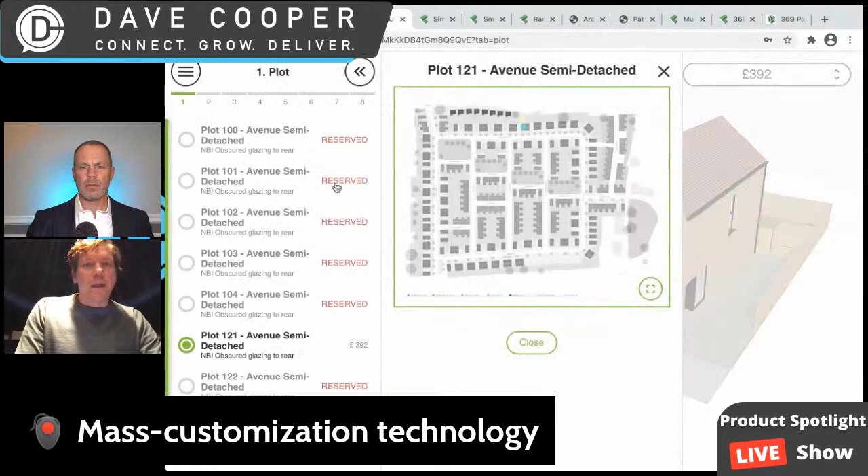So this is actually a project in the UK. It's NU Living, or Swan Housing is the developer, and they have a development of 250 homes in Beechwood, in Essex. I'm just going to run you quickly through it. You see lots of these have actually been reserved or sold, so there's only a couple of plots available here. Let me go with this one and show how it looks.

Essentially, we're dealing with the full 3D model. Are we actually on a builder's site right now that's using this? Yes, it is. It's a live version, so you can go there and complete the journey and then submit your order. And if you have enough cash, you can buy it as well. This solution can be embedded to any of the websites.

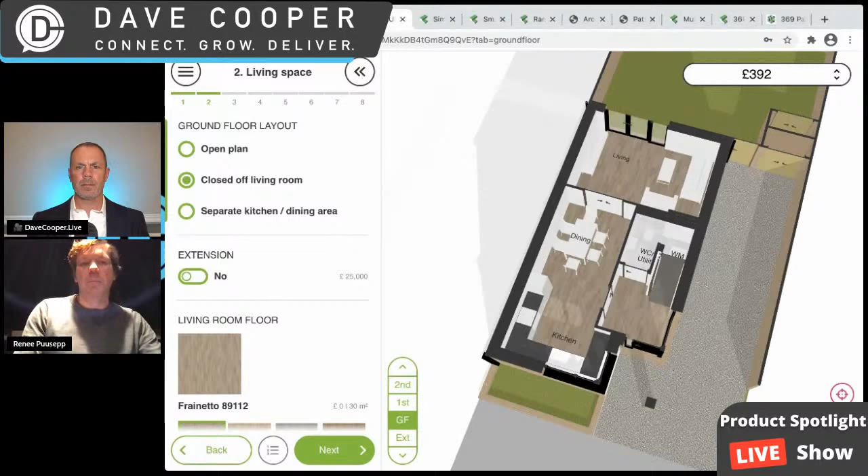I'm currently showing it to you from the Creatomus platform, straight from our back door, but essentially the way it interfaces with the home buyers is actually embedded to the development website. So just what options can you have?

We have things like we make the geometries, and you'll note how the pricing is changing as well, so each of those components can have a price component. We have material choices here. Let's see what we have. Oh, we have like furniture, equipment, anything you can choose, and each of these choices can have its own price tag.

What else? You can go down to door knobs. I mean, they even have a wine cooler here. How good is that?

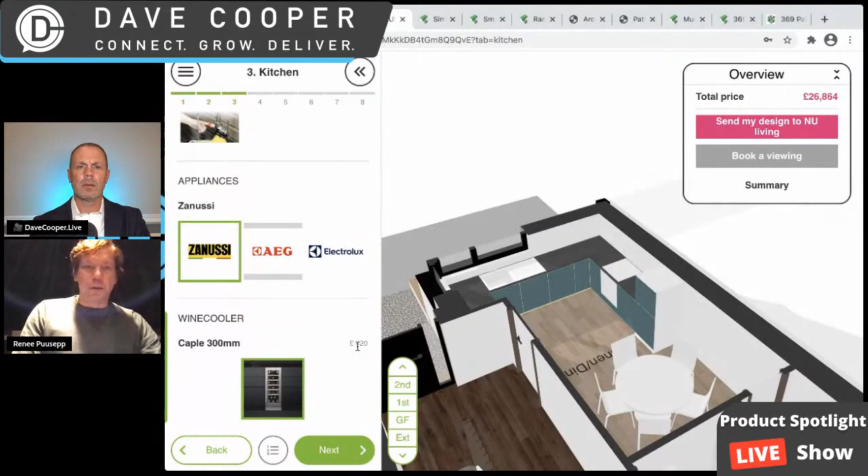Another way this configurator is helping the developer is to upsell their product. So if you want the wine cooler, you have to pay 420 extra. So basically, as a consumer, this developer has this on their website, and as a consumer looking for a home, I can go on their website and configure everything in the house that I choose, and it's actually giving me real-time pricing.

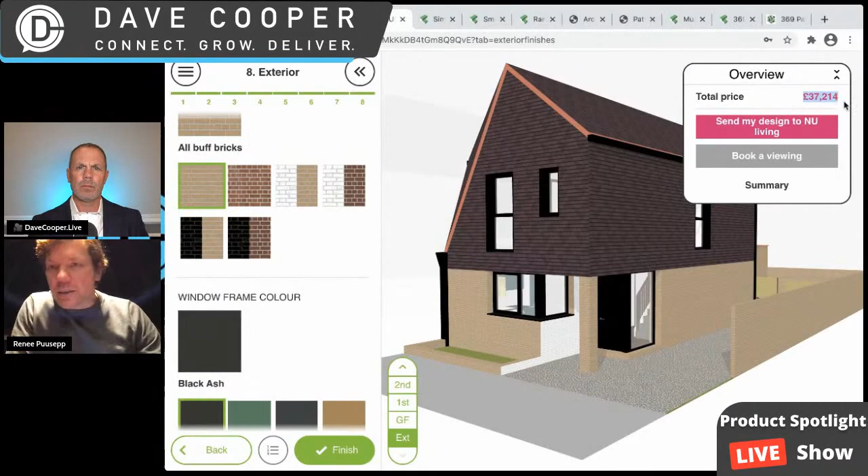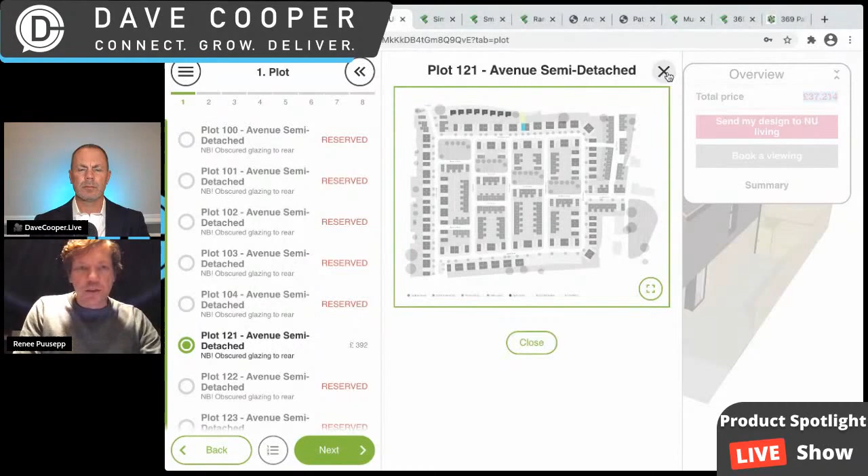Indeed, so that's the price that you have to... oh, actually I need to go and change. I think it was one of them. Let me see. Oh yeah, sorry, I'm not showing the live version, I'm in a currently developed version. So yes, it will show you the full price, and then we'll see it in other cases.

I'll run you through the entire journey. So basically, once you've done your customizations, you get to the summary, where you get the full overview of your chosen designs, with those images as a takeaway. You can download the summary, you'll see all of your choices here, you'll see the price of all of your choices here, and then you simply download the summary. And bang, you got the PDF takeaway, which is actually your order.

And this order was sent to the e-signing. It's actually using a digital signing platform, and the orders are completed online as well, kind of bringing really the buying and selling of houses online.

So with this developer, they're not a manufacturer, but they work with a manufacturer. Is that how I understand it, or are they the manufacturer as well? They have a manufacturing arm as well. These houses are actually made of CLT panels. They bring CLT from Europe but put it together in the UK factory, their own factory, and then it's transported to the development site, which is quite close to the factory, so it seems to be like a good way of doing it.

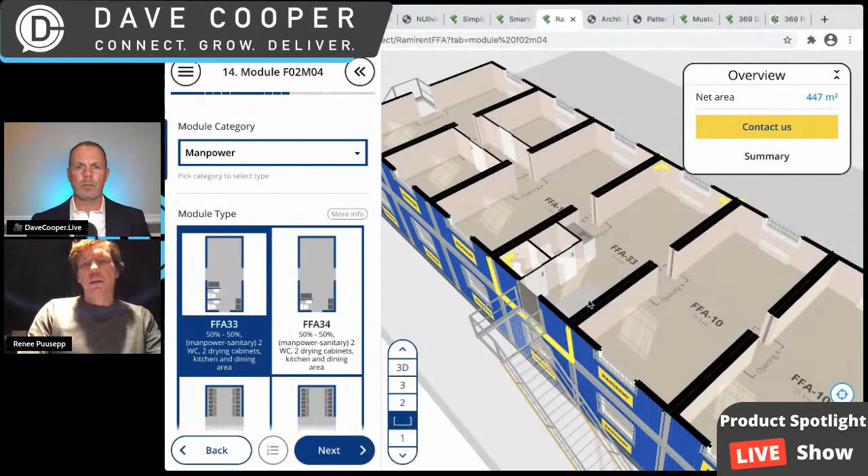You can choose the doors, and then you've got the clickable option. You can go into a specific module and configure this one. Let's choose this one—each module has its own sub-choices. And we also moved... let me show something from behind as well here.

So this is one example of a student dormitory. There are actually a couple of different options here. Let's see if I can show that.

In this case, we're actually in a full volumetric modular mode. So you can go and choose—not just pick the wine coolers, but actually change what type of dorms you want. Do you want separate rooms? Do you want 3 rooms joined together in one apartment, or 4 rooms?

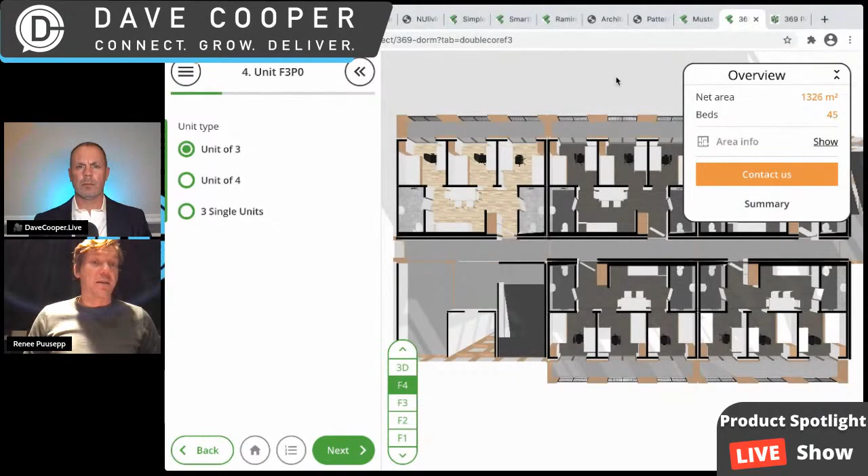I think the system is pretty flexible now, and we've been pushing it for 5 years. We've got a dedicated team of software developers. Most of us are actually architects by background, but I think that has to be—in order to create really specialist software, we need people who don't just know how to code or program, but who know the domain throughout.

In order to give us this edge, we've been working with lots of individual manufacturers, going and doing designs with them. So our typical model is that we provide a service for setting up configurators. You can come with your own designs, with your own architect if you wish, and we'll set up the configurator for you and run it as software as a service.

But recently we started doing our own designs as well, especially in terms of the modular setup. We can work with manufacturers globally who don't need the local knowledge, such as building regs. We don't design the layouts, but we help you design the modular logic behind the system.

Well, let's jump to the audience here, and when we come back, let's dive into how one gets started with setting this up, and talk about the level of detail on how this translates from a pretty picture for the consumer into the manufacturing process—I think that would be a good part of this conversation.

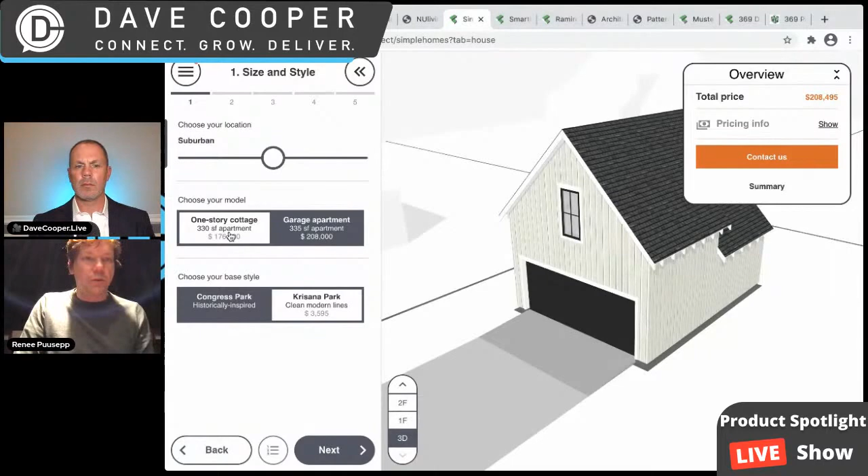We are in very good contact with them, and I really like their direction. They're really trying to reinvent manufacturing. They came to Estonia, they've seen the factories here, and we've been working with them on several projects. This was the first one, and this one is the same thing - options, choosing options, choosing the components to load in, choosing the materials.

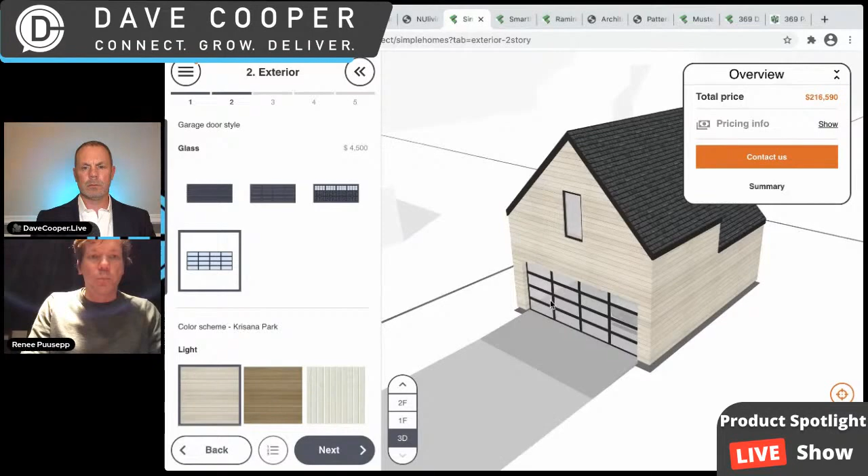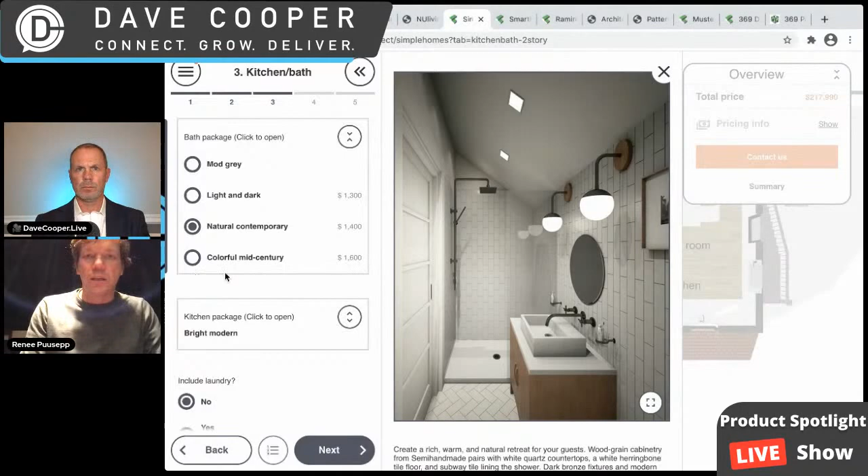Going through it step by step, you can integrate fancy renderings because we're showing the 3D model here, and there's only so much you can do in real-time rendering. So we improve the user experience, which is one of our key concerns since it has to interface with the end user. We integrated other sources of media as well, so typical renderings work here too.

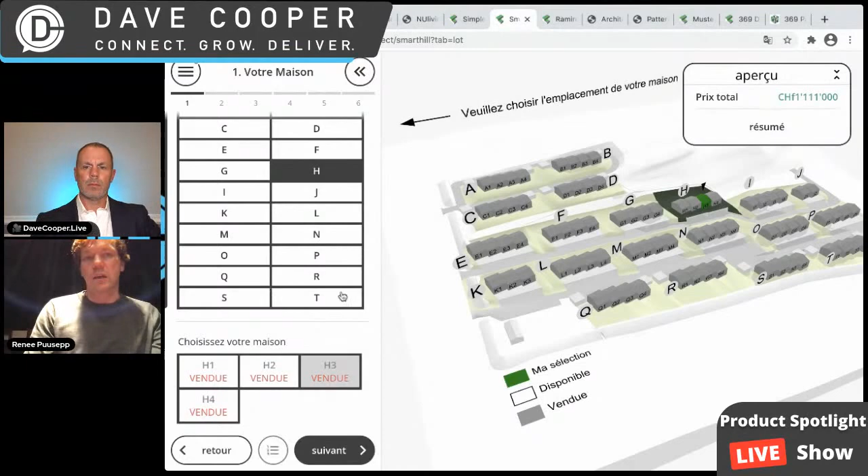This is one of the US projects we've done. Maybe I'll show you another one - this is a Swiss development, so all those plots are actually reserved. I'm not quite sure if they've been delivered yet. This is not a modular development, the design is configurable. They realized the need to offer customers customization options, and it goes to plans.

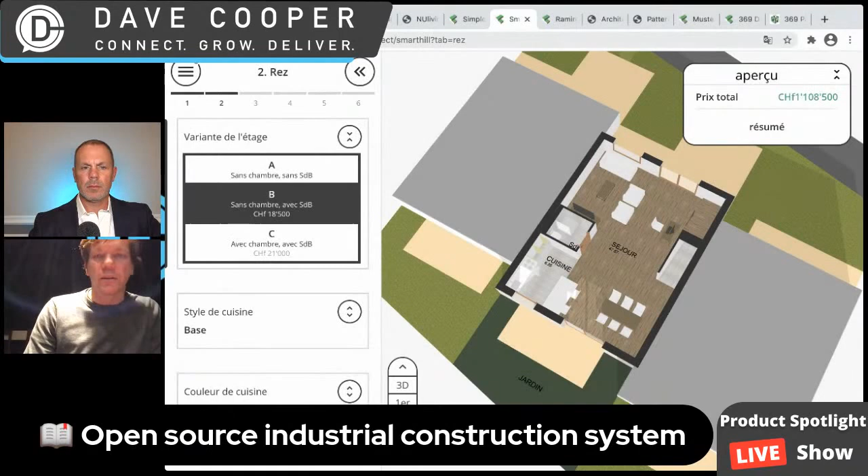So that's all in French. If there are any French-speaking people in the audience, you can go have a look at this one as well. I'm sure Henry Mickelberg could take a look at that and give us his two cents. All right, perfect, keep going.

And the one I already showed was this one. This one is still kind of in development, and we're looking more into modular logic - looking at how to actually allow people to move around objects within those models.

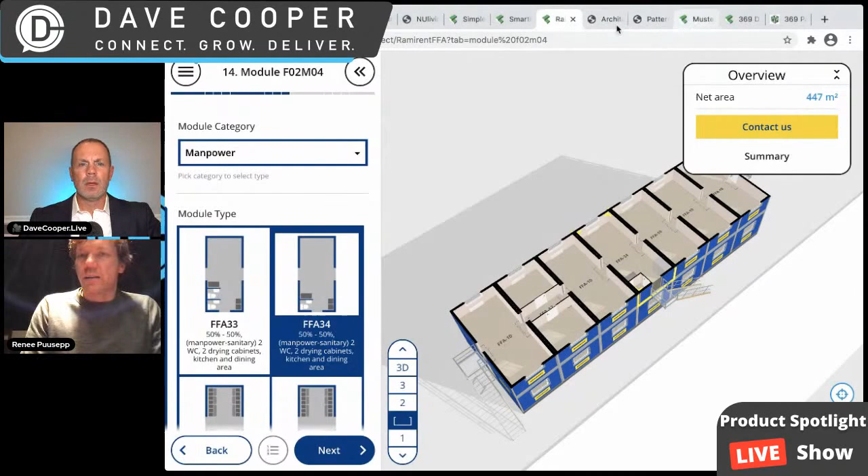And maybe I'll jump to the 369 pattern building system as well - let's take a look at that. That's important. So basically, we're coming back to our background - we are architects. We think architects need to actually change their way of operation if they design for manufacturing.

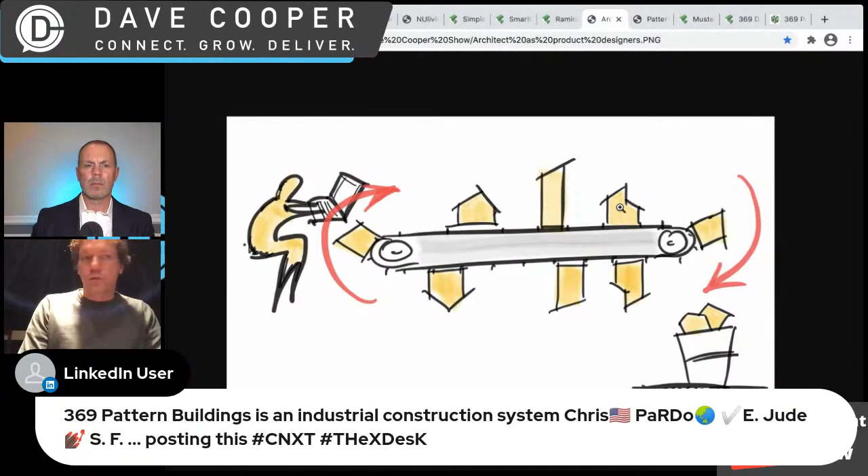So instead of designing one-off objects, they need to behave more like a product designer - working on houses as products, made out of a kit of parts. Your concern should be how you design your components and how you put them together. But it's a lot of work, so in order to help architects design modular buildings which are configurable and mass customizable, we invented this.

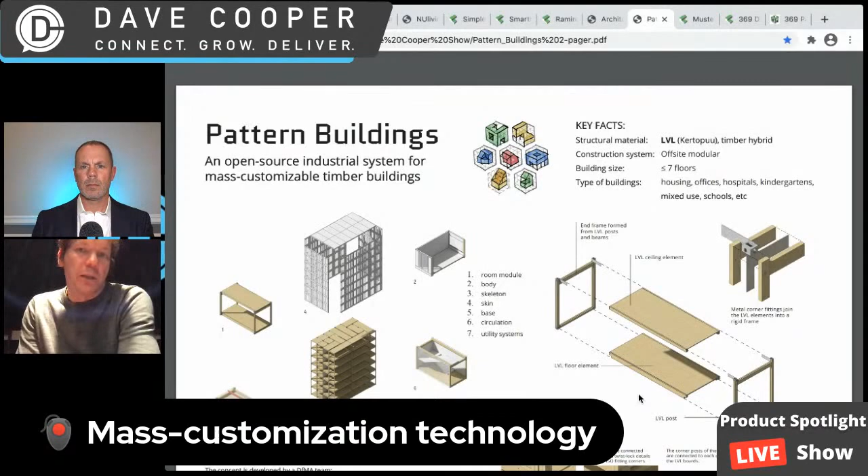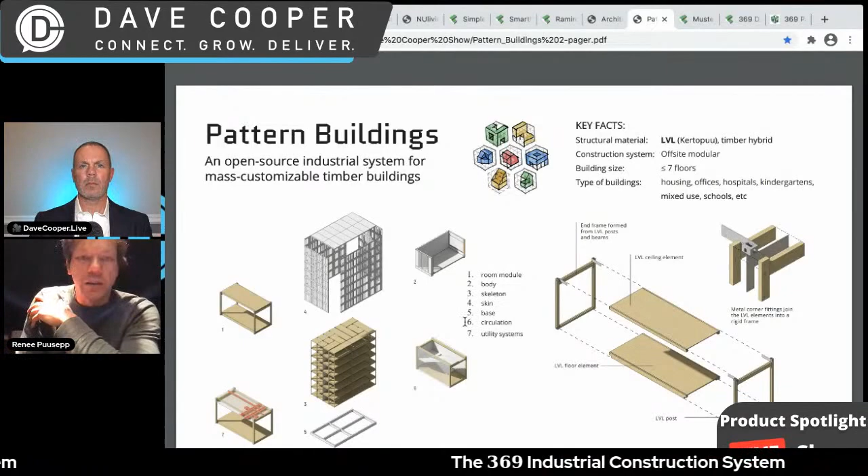We call it 369 pattern buildings. It's an open source industrial construction system for mass customizable timber buildings. You can go up to 7 floors, but the real limit is the span. The typical module we have is 6 meters wide, and we can go up to 9 meters wide - it's the span that limits the use of it.

But essentially, you won't be building cathedrals with that. You can build kindergartens, schoolhouses, apartment houses, private homes, prisons, hospitals, you name it, office buildings. It's made of LVL, laminated veneer lumber. We designed specific corner details that allow them to connect in a modular way.

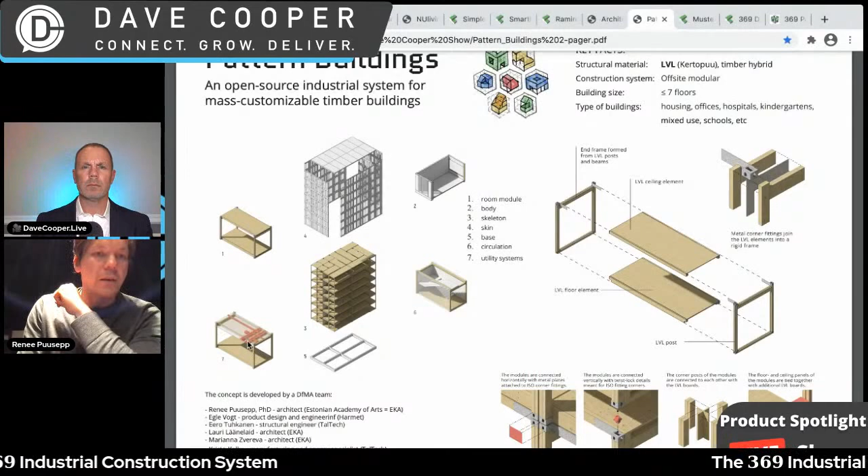And we've figured out the basic utility systems that should go in, and the interface of how the modules connect to one another. This system allows you to design fairly rapidly those modular buildings. And since all the basic components are also pre-engineered - there was one question about pre-engineering, post-engineering - since it's all pre-engineered, we can tell you the price as well, at least of our basic modules.

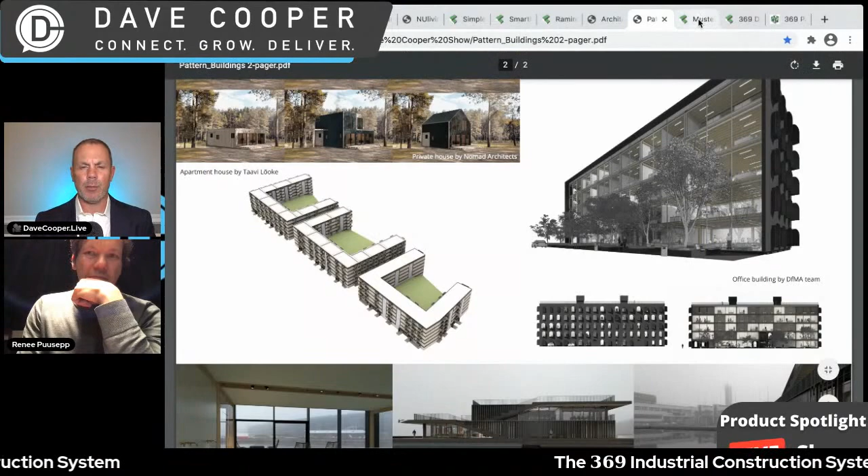The kit of parts is already assembled in the computer, so the data is there. It's a matter of putting that kit of parts together, and it can spit out a price so long as you're keeping up with the market. There's an example - Nomad Architects, one of our partners, has done a design for the German market: a private home, in a rural setting, I should say.

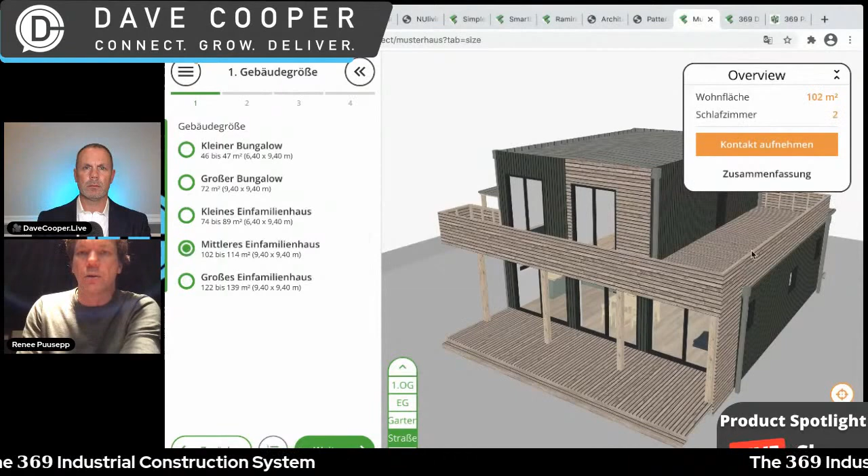Yeah, so that's how it's made. This one is made out of 6 modules stacked up on another one. If you lose that, you lose one of the modules. But the house design is actually changing, and that's what users don't really care about. Buyers don't care whether it's modular or not. They really care about what spatial quality you get, what sort of options, what look and feel you get out of it.

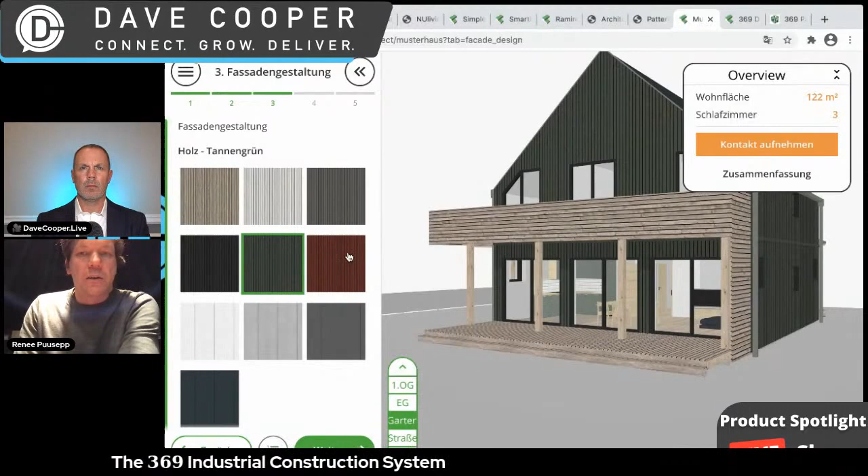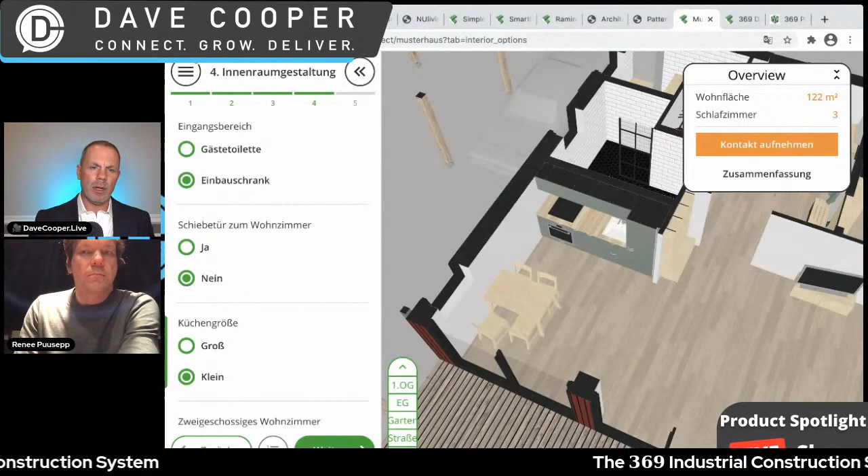So, let's jump into how do you get started with this? If I'm a manufacturer or a design build firm, and I want to work with Creatomus and use your product, how does this work? Earlier there was a comment asking, is it a ton of work, or do you just start with small pieces and grow into it?

Well, it's exactly like you said. You can start with the simpler version and grow big. You can also come to us if you have a system, and we'll have a look at your system. We draw out what we call a decision tree, which outlines all of your components and the relationship between these. So we do a translation - how does it translate to the user language? Who are you talking to?

First question obviously is, are you talking to business clients, or are you talking to private clients? Our configurator is actually configurable, so we can build the user experience you need that addresses your customer needs. It's really a service behind that - a technology supported service. We help you set up your configurator.

Then you can go there and have access to all of the pricing, change the pricing, change the product names, change the pictures in there. So there's a self-service interface for you to manage the content. But the setup is usually done by us, and we work with a bunch of modelers who help us create them. We train them, and they help us provide you a service of setting it up, while our core team just does project management and software development.